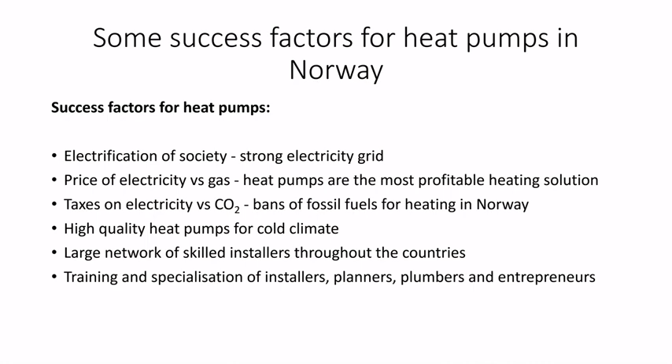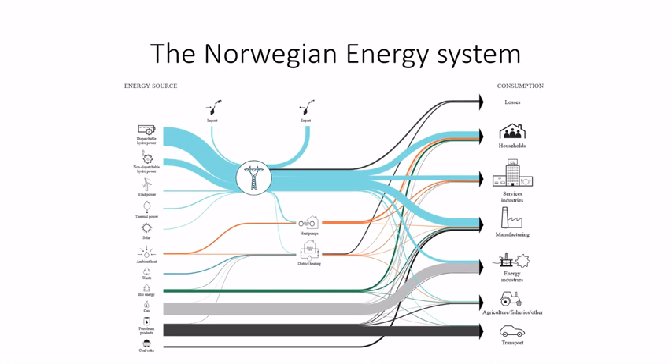So now we'll go through this really fast, but heat pumps are becoming a larger and larger part of the Norwegian energy system. And the use of fossil fuel for heating is nearly replaced. As you can see in blue, that's the use of electricity. So lots of industrial processes are by electricity, and also with heat pumps in households.

More than 50% of single family or detached houses have a heat pump. So more and more of Norwegian society is electrified, and that makes it easier to use heat pumps. The downside for many years has been the low electricity prices, so nobody really cared. But because of the really high prices we have now, more and more people are buying heat pumps.

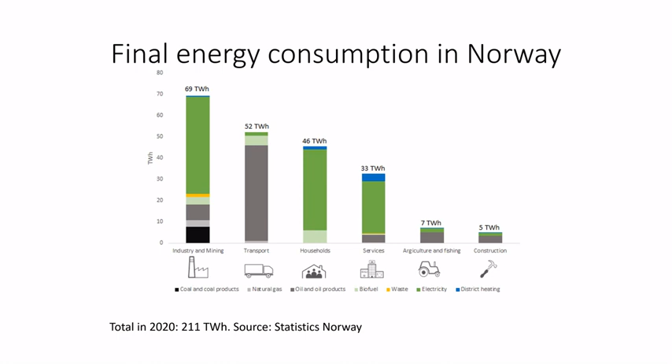And 98% of our use of electricity, or the production we have in Norway, is 98% renewable. That is one of the reasons why energy efficiency hasn't had the same focus, because lots of politicians say we have clean energy, we have more than enough electricity.

Up till October 2021, it was said that they had more than enough electricity, and then Statnett came with this report saying that in the southern part of Norway, we probably have to import to be a net balance. And now everybody's talking about new production. Energy efficiency is mentioned now and then, but now it's nuclear and offshore wind and new technology.

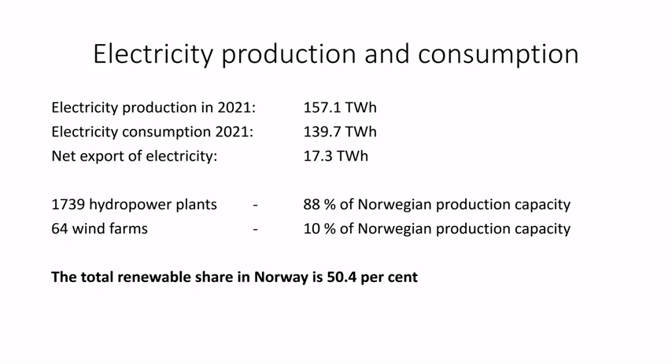We will see more offshore wind, but not within the next 5 years, after 2030 something. And will we see as many windmills as they claim? We'll see. The most cost efficient is onshore wind that has a really low production cost, but it's only 2 municipalities in Norway that have said that they are open for building windmills, and that is 2 small municipalities in the Varanger area up in the north.

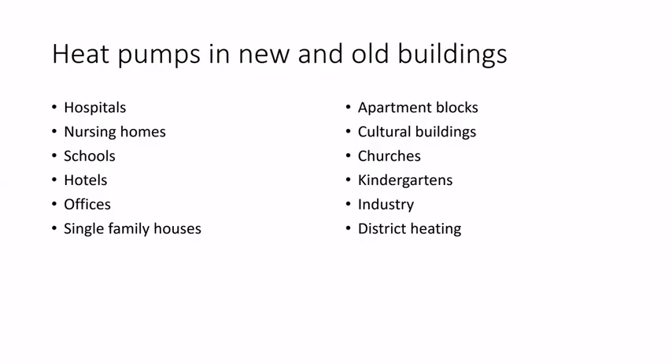So for those that are not Norwegian, if you live in Norway, you probably know that electric heating is common, and most homes have a fireplace. But we have heat pumps in both new and old buildings. We have high quality heat pumps, but since most buildings have direct electric heating, it's air-to-air heat pumps that are dominating. And the geothermal heat pumps, even if the payback time might be 10 years, many claim it's too long. And if it's 15 years or 20 years, it's too long.

And what they quite often do in their calculation is that they include the boreholes. And we don't know how long the boreholes will last. Is it 60 years? Is it 100 years? Or is it 200 years? As long as you don't have fracking or something, they will last really, really long. So they shouldn't be included in the calculations when you're talking about a payback time of 15 years. Because the geothermal heat pumps normally last plus minus 20 years, lots of them up to 30 years. And when you have to replace the heat pump, the only thing you replace is the heat pump. The rest of the system is there.

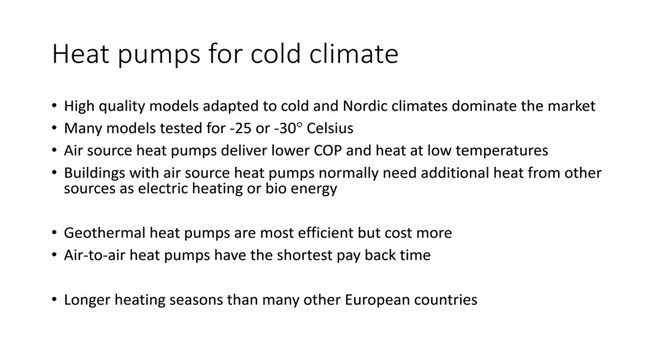The reason I show you this is that too often we hear this number from Asplan Viak and others that there's a big potential for geothermal, or grunnvarme. And the theoretical potential is really big, but if you look at the realistic or the economic potential, then you have to include how many of these buildings have hydronic systems.

What I will show now is the potential of buildings, but you also have a big potential in district heating. You will see more and more heat pumps in district heating. There's a really big growth in, for instance, Denmark, with more and more really big industrial heat pumps with the boreholes.

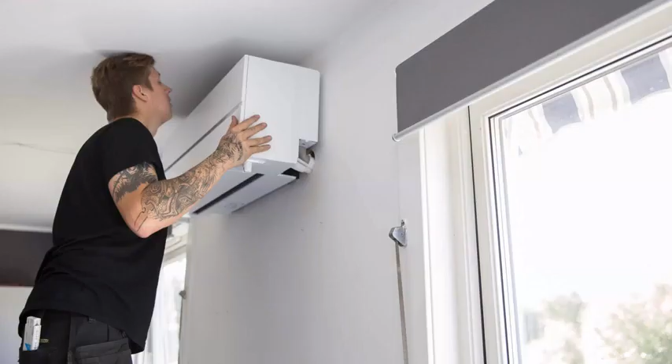But when media contact us, they want to learn about heat pumps. All they ask about is the air-to-air heat pumps, because that is what they have heard of. Many of them haven't heard about geothermal heat pumps. I talked to NRK today, who will probably make 2-3 articles of something we discussed today, and I had to explain what a geothermal heat pump was. So many people are not aware.

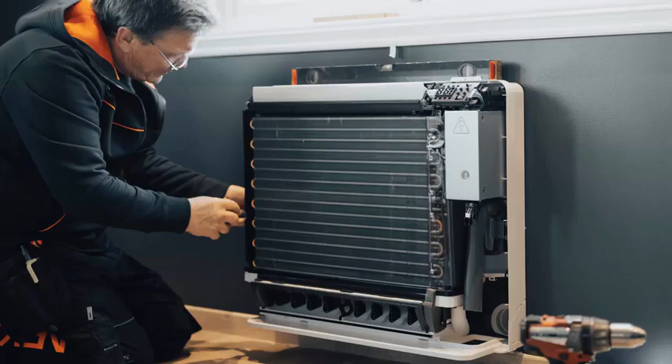And building owners often say, no, we don't have a heat pump, we have bergvarme. Some of the owners of the building actually don't know that it's a heat pump that is heating up the building. They get from -2 to maybe 10 degrees. Sometimes it's like a slurry, really cold at the end of the season, and that is not heating. That is the energy source. It's something different. But in Sweden, everybody knows about geothermal heat pumps. So yeah, the different kinds of air-to-air heat pumps.

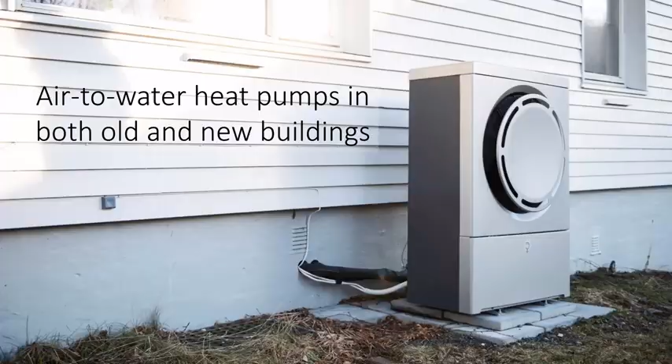The heat pump market in cabins in mountains is growing. What we see is that large cabins are quite often now built with geothermal heat pumps, if they are 150 or 200 square meters or bigger. There are some really, really big mountain cabins out there. So there are lots of different heat pumps.

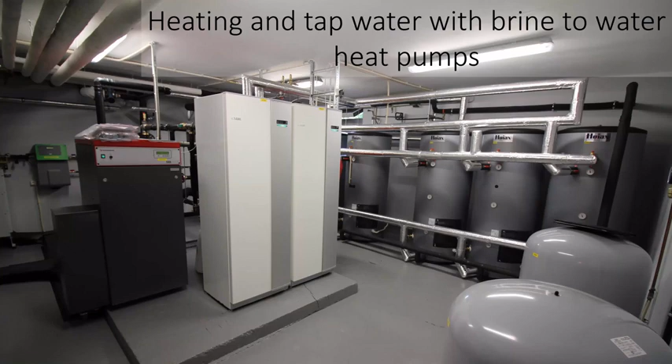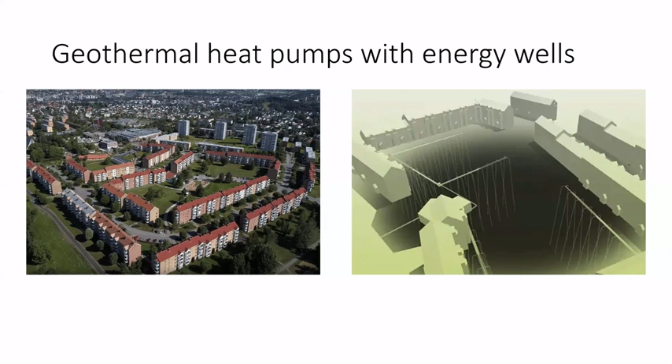And you have drilling in multifamily houses, and in single-family houses. And this is where an oil boiler was replaced by a heat pump. This is Manglerudjordet, one of the biggest energy wells for multifamily buildings in Norway, but there are lots of them all over Oslo. Nils, do you have bigger energy well parks for multifamily houses in some of the other big cities? There are other commercial projects, not of this kind. No, so other kinds of buildings normally.

And just to show that when we are talking about potential, in some cities you also have a potential from heat pumps from sea. But actually lots of places where you have buildings close to the sea, they still prefer geothermal heat pumps. So there are some upsides with geothermal heat pumps compared to sea. Like if you use seawater, you need to know what to do. You have ice and other things that you have to consider.

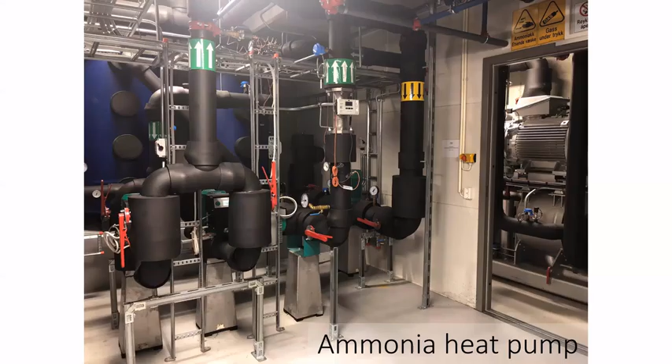But this building, this is Powerhouse, the head office of NOVAP, and BE is the nearest neighbor. And the ammonia heat pump is this little thing. It's heating those two buildings. And the energy production from that heat pump is much larger than the solar panels on the roof. But what gets all the attention in media is those solar panels. Of course, they're important, but nobody knows about the heat pumps because they are down in the cellar.

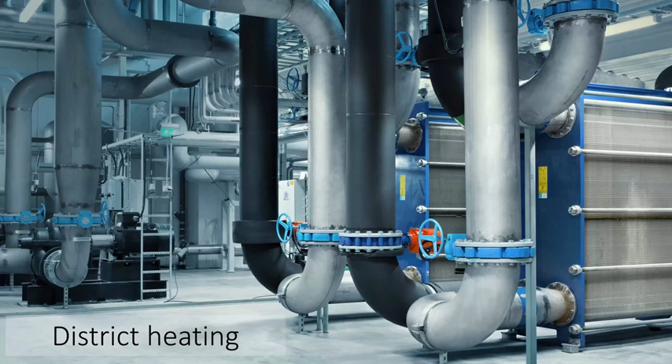And also district heating, there are more and more heat pumps in district heating, and many are not aware of that. For instance, Oslofjord Varme at Bærum, everything is by heat pumps. And now I will speed up. As you probably know, fossil oil is, yeah?

Oslofjord, do they use the sewer system as energy? No, mostly the biggest one is from Fornebulandet. They have seawater heat pumps. Okay. And also they have in Sandvika, and they use some bio-oil as backup. But I'm not sure if they have sewer also. They might. The biggest heat pump in Norway is under Vigelandsparken. That is owned by Hafslund Oslo Celsio. So that is by sewer. And you also have in Stavanger some places where you use sewer.

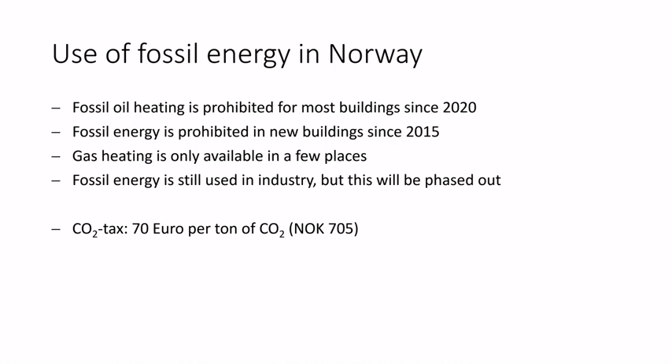Yeah, Oslofjord Varme, they have the big district heating area that is Fornebu and Bærum, but then also they have some single satellite systems around in Oslo that are owned by them, Alnafossen and Posten. Yeah, okay.

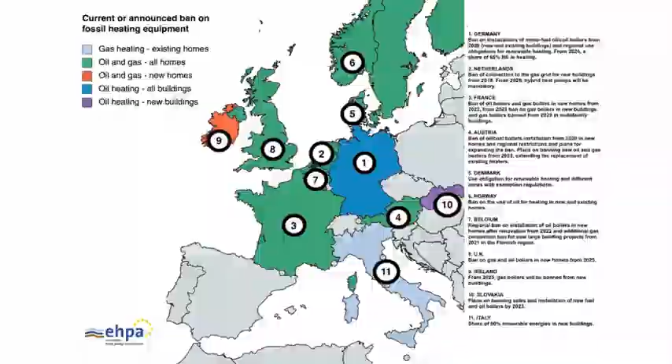Fossil heating is banned now in Norway, and it will be introduced in more and more countries in Europe. The main reason why we have increased sales of heat pumps in Norway is because of the high energy prices. So I will show you the statistics now in some seconds. So 2022 was the best year ever. Really big growth in air-to-air. Nice growth in air-to-water and brine-to-water, but as I will show you, it's nothing compared to Sweden and Finland. The market is so small.

What we see is that even if some commercial actors have started investing in heat pumps, like training centers and offices and whatever, most actors when it comes to commercial buildings haven't done anything the last year. They don't know what to do because the focus on energy efficiency hasn't been there for many years.

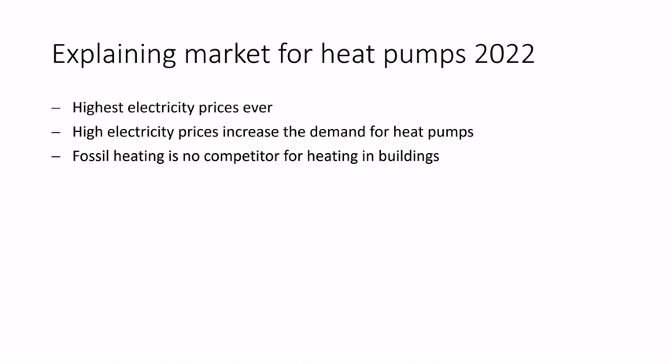We had a political goal that we have to reduce the use of energy in buildings by 10 terawatt hours from 2015 to 2030. They haven't done anything with it in the oil and energy department. They have tried year after year to say that now we have fulfilled these obligations. And in the state budget now in December, when it was agreed on, that was removed. So now it's checked out. So now we have to lift up that end. So we don't have any goals.

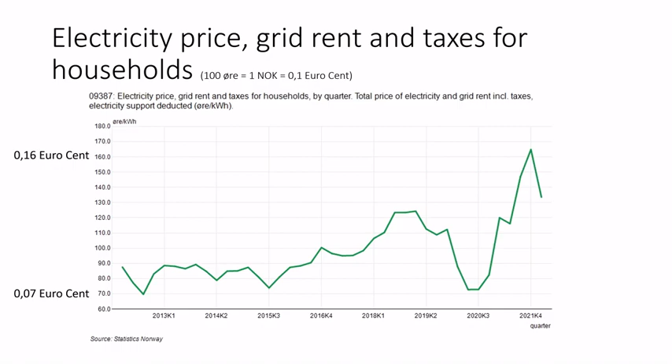We haven't introduced the latest Energy Performance of Buildings Directive. We haven't included the Energy Efficiency Directive of the EU. So every country in Europe has goals for reducing energy, but not Norway. So I will speed up now.

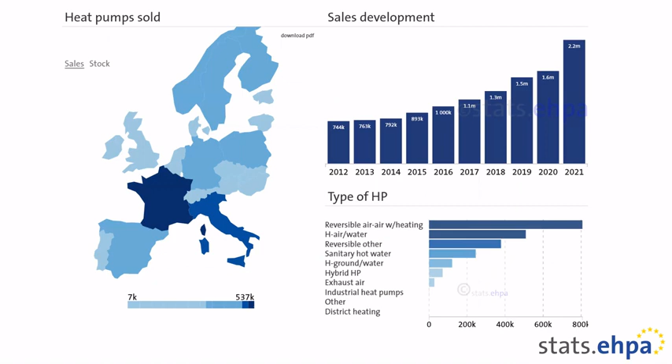So here you see the statistics for 2021 from Europe. The statistics will be available in a month or two for 2022, but I have numbers from some countries. But as you see, even in Europe, it's air-to-air and air-to-water that is dominating. You can see here, ground source heat pumps are not growing that fast. It's actually those based on air as energy source that are growing.

And the reason is that in many European countries, they are not allowed to drill for many reasons. There might be difficulties in some places, and some places they are just really conservative. And also in many countries, they use groundwater for drinking, and they are so concerned about leakages from energy wells.

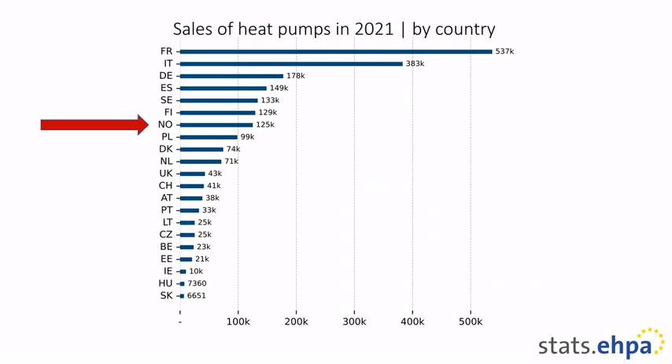And also that the air to water heat pumps are cheaper than geothermal heat pumps. So price is also... We are among the top sellers, but if you look at per household, it's Norway, but for next year, it probably will be Finland because they sell much more heat pumps than us now.

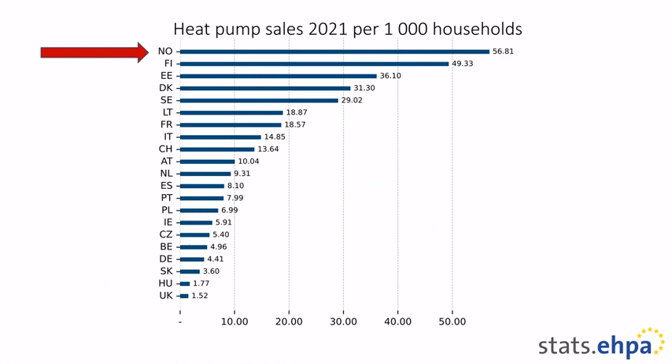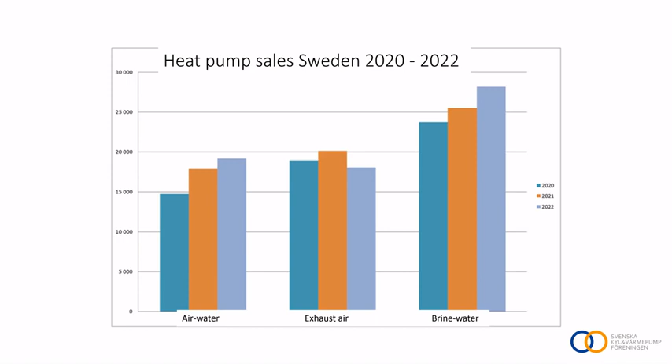This is statistics from yesterday from Sweden. So look at those numbers now. Geothermal heat pumps, that is brine to water, like nearly all of them are geothermal heat pumps. They sell yearly between 25, now it was close to 28,000 geothermal heat pumps sold. And that statistics is underrepresented because there are still some big players that don't use statistics in Sweden. So the sales numbers are even higher than this.

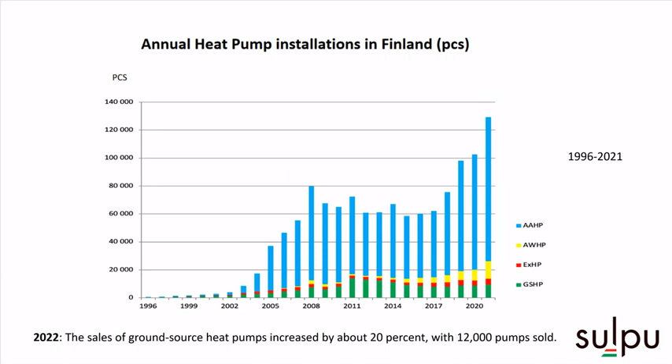And this is graph from 2021, but as you see under in Finland, last year they sold 12,000 geothermal heat pumps. And that market is growing. As you can see, it grew by 20%. The total market in Finland, they had a growth of 50% last year.

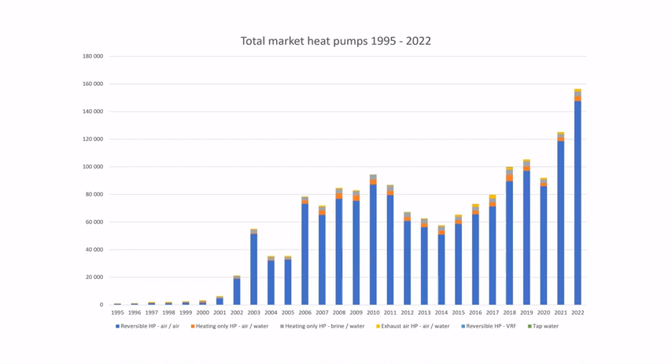And here you can see Norway, totally dominated by air-to-air heat pumps when it comes to, this is number of installations or number of units that are sold, not energy. Of course, if we have statistics on the energy that are delivered, you see that the big heat pumps, they have a bigger share of the energy mix. But here you can see like 156,000 heat pumps in total.

So when we are talking about potential, there's a large potential in Norway if we have more companies specializing on geothermal heat pumps. But then we have this problem that we don't have building codes similar to the rest of Europe. In all of Europe, they don't use the boundary for calculations. In Norway, it's only the boundary. How much does the building use? Not how much energy do you buy. So if you invest in a heat pump or solar panels, you don't get any incentive from the calculations.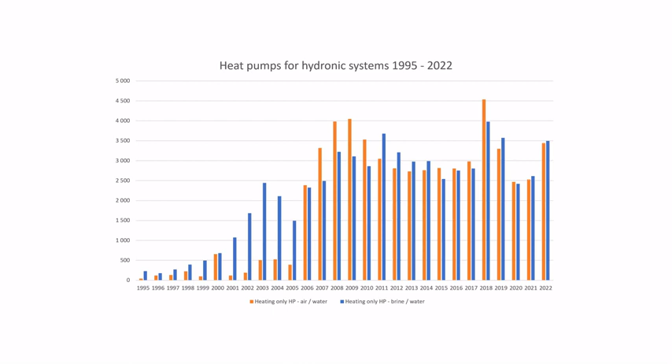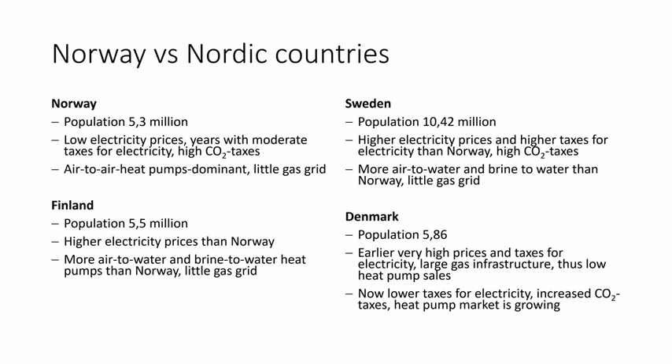So those who choose heat pumps in new buildings, they do it not because of the building codes. It's because of BREEAM. They are going to have it themselves. They have demanding tenders, etc. So I will skip this, but in short, they have higher energy prices and more hydronic heating in our neighbor countries, and that is the reason why you see more air-to-water and brine-to-water heat pumps in our neighbor countries.

And here you see the total numbers we have. It's quite similar to what Kirsti showed. Kirsti's statistics is based on other sources, on boreholes, but our statistics is based on all the importers in Norway. They send to Prognosesenteret every quarter their sale numbers. So 2 or 3 times today, you have been talking about statistics. So these statistics go to Enova, NVE, and then to Statistics Norway. So the statistics they use for heat pumps is from here.

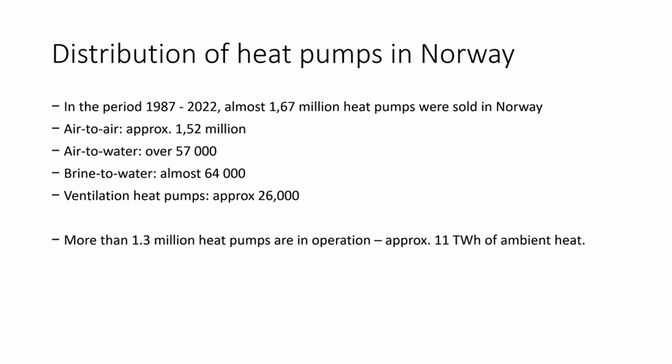But still, there are some actors that don't give us their sale numbers for geothermal heat pumps, especially the big ones that you find in industry and the commercial buildings. So we actually have higher sale numbers. And now, there's still too many politicians that don't know how much renewable energy we get from heat pumps. This is the 2021 numbers, not the 2022.

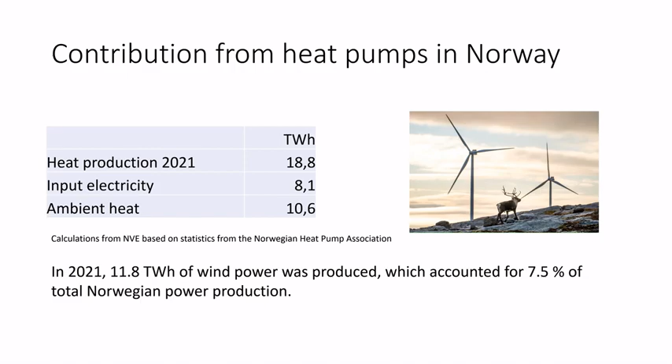So now we have more than 11 terawatt hours with heat from heat pumps. That is the same number as the total energy production from windmills in Norway. And you can see how much attention windmills get, and nobody talks about the heat pumps or the potential for more heat pumps. So we have different kinds of statistics showing the potential in different kinds of buildings.

And then at last, we have conducted analysis from Multiconsult and CGER looking at potential for heat pumps in the old buildings and new buildings. And then last year, SINTEF made a report also looking at the potential. So the potential for heat pumps in buildings, the realistic potential within 2030 is around 11 terawatts or 15 terawatts. But then in addition, you will have industrial processes, and you might have football fields and district heating.

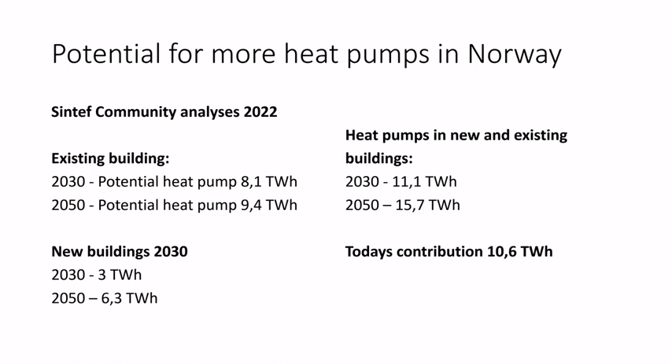So at last, what I would say is that one thing is politics. We are working a lot on politics, but we do a lot of training. And together with Jørn, who had a presentation now, we are developing new training courses for engineers on planning bigger systems and for plumbers. And we are going to have courses on energy calculations for energy wells.

And also, together with Jørn, because he didn't mention that, we're working on making new guidelines for owners of commercial buildings, so their tenders are better than what they have today. So when will these courses be available? As soon as possible, but they are working on them now, so it's probably from after summer. Because we had some courses for some years, but they are being revised now, so we are not having them before they are ready. Okay, so I will stop there.

Any questions, comments? Yes, Julia. And sorry, I didn't use 15 minutes. No, I used much more than that.

Yeah. Just a comment, it's very interesting to see that you have the same challenges as, for example, we in Austria regarding the training. Because the first thing a plumber learns in Austria when he starts his education is how to install an oil tank in a house to heat the housing.

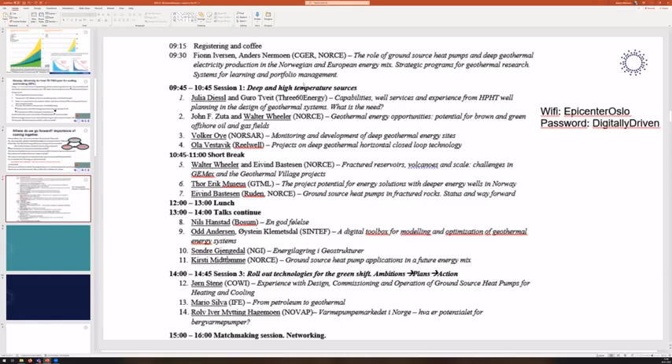I'm active in the European Heat Pump Association, and 2023 is the year of skills. So all of Europe now is focused on skills, but politicians are just talking about that in general. But what we see is what you said. All over Europe, plumbers don't get the right training when they go to school, and they don't understand heat pumps. So even if Austria and Switzerland are front runners on heat pumps, you have challenges, and you will see what kind of challenges you have in other countries. And you probably need to start even earlier, so that people entering the level of becoming a skilled worker question these things in the training.

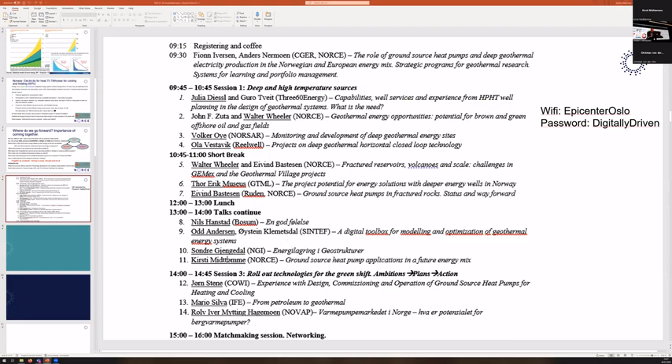One quick question, please. Why brine to water? What's the brine for in a brine to water heat pump? Why it's not called water to water? Is that what you mean? Clearly it's water on one side, brine on the other, but why brine? No, it's just a name. When it comes to statistics, some say water to water or brine to water, but that is actually the fluid that you use when you heat from the energy source.

So they add the brine to the water to enable the well to function in minus degrees. It's an antifreeze, so instead of using an alcohol. But you have some environmental requirements. Then I understand what you ask about. That's what I meant. Before it was more common to use glycol, and then different kinds of alcohols and different kinds of additives, and you know all about that, Nils, how environmentally friendly the different fluids are. You are trying to find new ones, also because you don't want leakages. For many systems you don't have any leakages, but if you have leakages, then what? So there's lots of focus on what kind of fluid you can use.

Yeah, nothing you can drink. Oh, but whiskey would be very environmental.

Last question before we call it a day. Just a reflection, but I think the competence thing is very important. A friend of mine installed a big system recently. The heat exchanger was installed by the plumber the wrong way, and he hadn't found out. So I think it's a good point.

Well, you can have big buildings where you have used the big plumbing companies and nothing works and you can't understand it. They have to go through everything, and then you have valves that are the wrong way and all that. Even if the drawings and everything are right, you have to go and look. Oh, okay, it's there. So the people that are skilled, like Jørn, know exactly what to look for, because it's the same things that the plumbers sometimes miss.